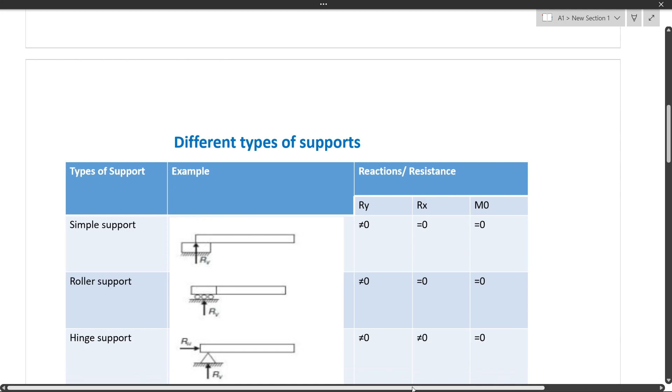First of all, why do we need support? Because it gives proper stability to an object when it's subjected to external loading. See, what supports do is give resistance to the object against the applied force. You see here, there is one book. It's rested on the table.

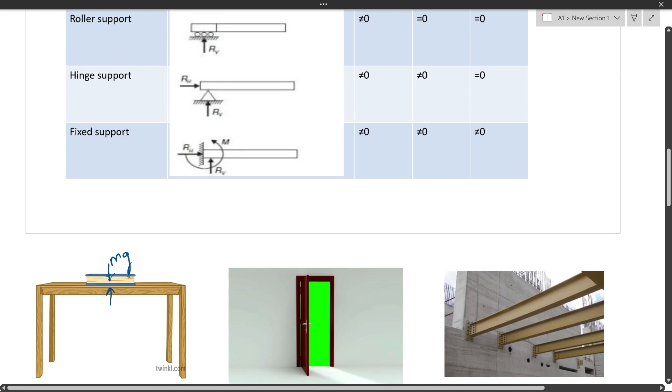This will create a downward load due to its self-weight. So this table will create an opposite force, that is reactions or resistance, that makes the book stay on the table. If there is no resistance, which means there is no table, it will definitely fall down. So this is what support will do. It will make the object very stable.

That resistance which I told you about is based on what kind of support we are giving. See, the resistance may be of three types: resistance in the y direction, resistance in the x direction, or moment about the point.

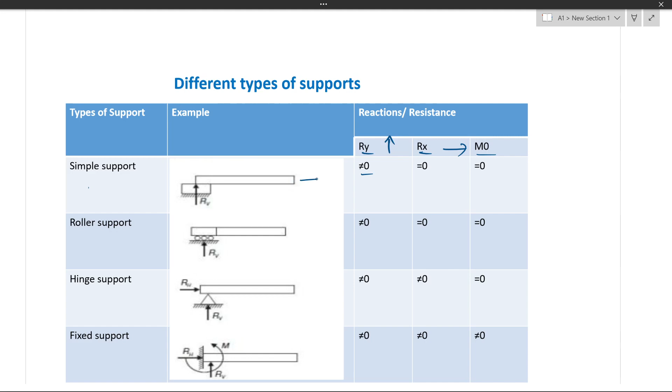If you take a look at simple support, it gives resistance in the vertical direction. So the value should not equal 0 in the vertical y direction. But in the horizontal direction, it can move anywhere in the x direction.

For example, if you take a book, it's freely movable in this direction or this direction, but in this direction it can't move because there's a resistance in the name of the table. So it will help the book not fall or move in these directions.

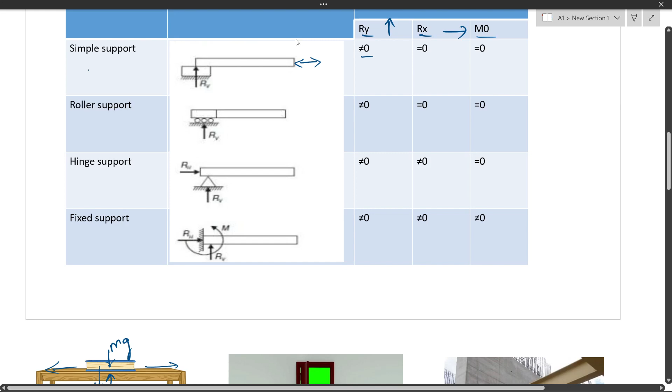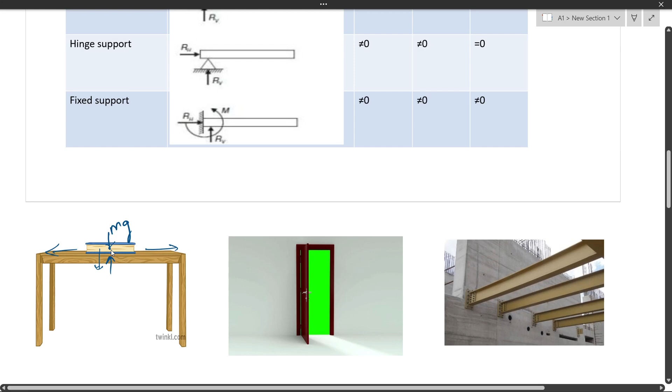The same way, roller support and simple support are almost the same, except there is a roller between the object and the floor. See here, if you put rollers between this book and table, the book will start to move because the roller almost nullifies the friction between these two objects. Why? Because the area of contact becomes very small since there is a ball between these two. It will reduce the friction.

Otherwise, the resistance would be the same. It will create resistance in the y direction, that is the vertical direction. In the x direction, there is no resistance. It's also free to rotate.

In the same way, there is the hinge support. What does hinge support mean? If you look at the door and how it's working, it can't move in any direction, x or y, but it rotates very freely. This kind of support is called hinge support. That means in the x direction it can't move, in the y direction it can't move, but it's freely rotatable. That is what the hinge support is about.

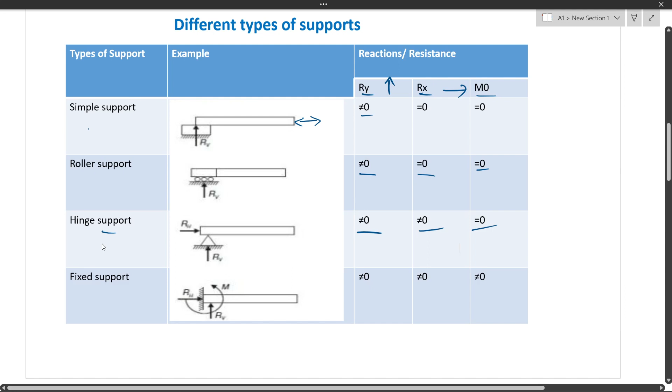It's mainly used in applications like trusses, beams, those things. We can see the hinge support mainly in bridges. If you see the truss, they made it like that with hinge supports.

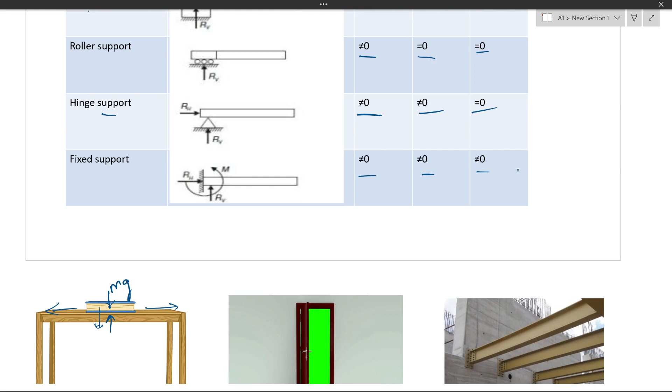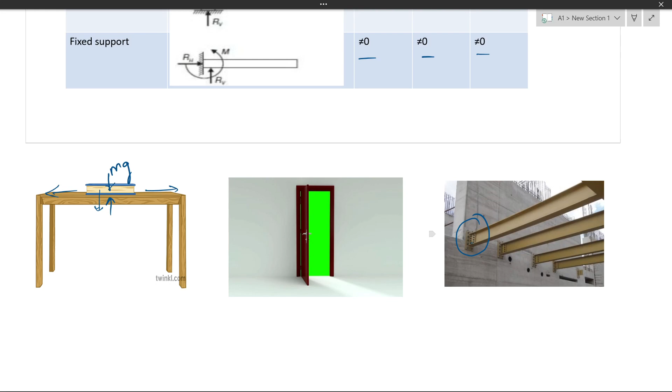And one more support is the fixed support. Fixed support means that it will give resistance to moving in the x direction, moving in the y direction, and also give resistance to rotation. You see this object here, with nut and bolt connections, which help the object stay stable. It won't move in this direction, and it also can't rotate in any direction. So this is called a fixed support.

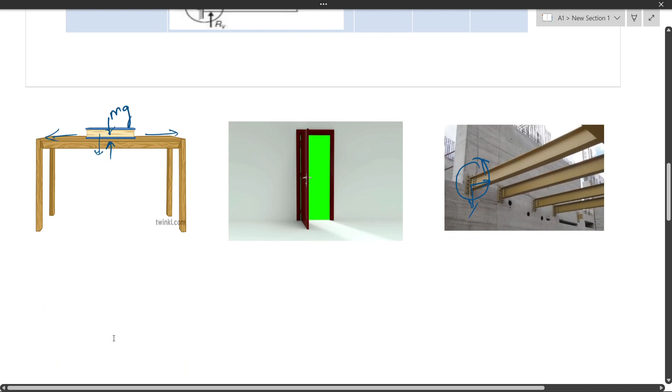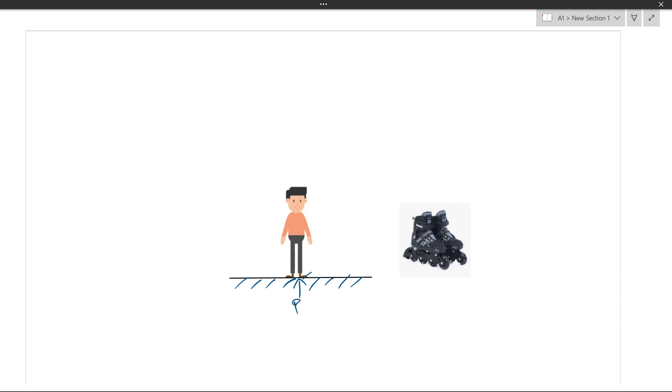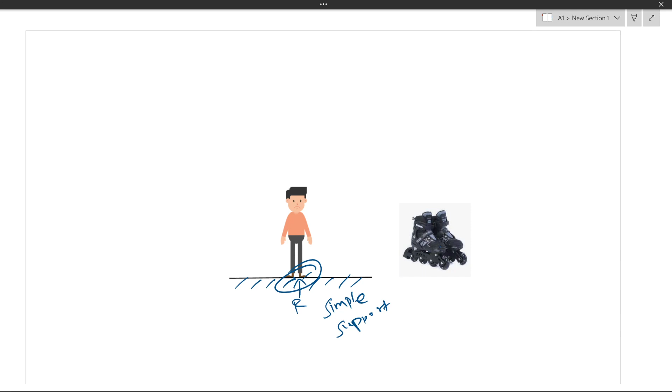And one more simple example I want to explain to understand the supports. This guy is standing on the ground. So this floor will give some resistance based on his self-weight. So this is simple support. If you remove his shoes and put on roller shoes, meaning between his feet and the floor there would be rollers, it will reduce or nullify the friction, so he can move very freely. So that's a roller support.

And if you look at the shoulder and the arm, what is the relation between these two links? He can't pull out his arm in this direction or this direction, but he can rotate the arm. So that makes this joint a hinge support. His shoulder supports his arm like a hinge support.

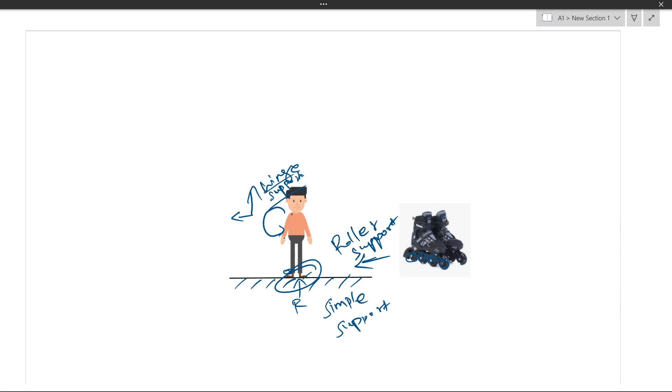I missed the fixed support in this example. Maybe you can consider that one guy is putting a lock on his leg, so he can't move in both directions, and he can't rotate. That is called a fixed support.

So in this video you learned about different types of support and what kind of resistance or reactions they create on the object to maintain its stability.